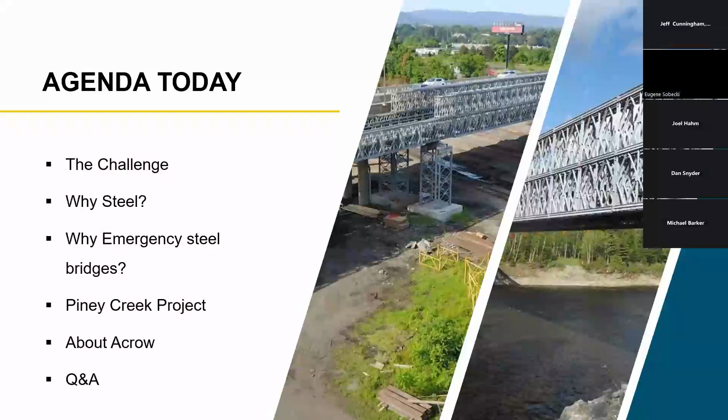Hey, thanks. Yeah, I'll be discussing this project in a little bit of detail, something that we just did very recently. And then I'll also be highlighting another project we did in the past, which also highlights steel in action. So to get started, what I'm going to talk about a little bit is the challenge and why our stakeholders choose steel and why emergency steel bridges are an answer for a lot of situations. About the Piney Creek project, and then about another project we did on the West Coast, and then at the end a little bit about Acrow and questions and answers, which we can defer to the end of the presentation.

Most of the challenges of all these bridges out there that need to be replaced have been highlighted in the ARTBA report. I don't know how many people access that, but it's a good database to find out exactly what's happening in our market. In the last one in 2024, it said 36% of all U.S. bridges require major repair work and replacement, and over 200,000 need repair, including another 76,000 bridges that should be replaced. So sometimes they need to get replaced a little bit before they're scheduled to be replaced due to washouts and storms and incidents, which I'll talk about here in the next couple projects.

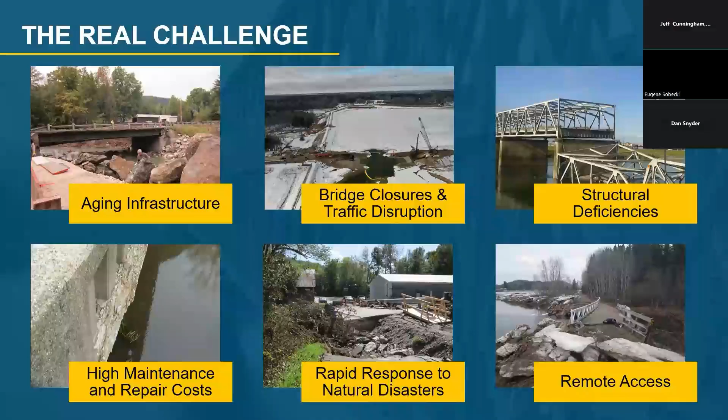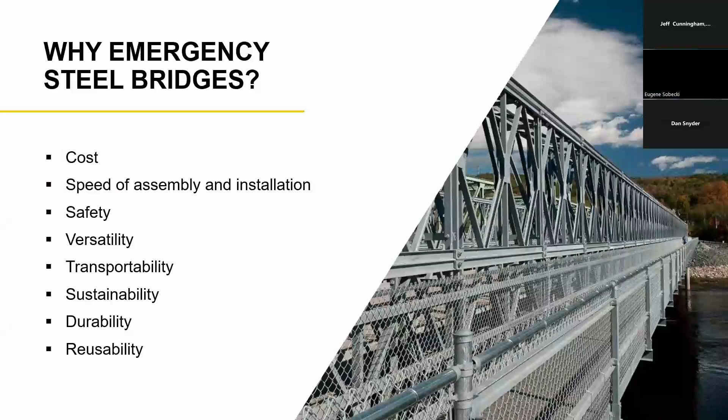Again, the challenge that we all face is the aging infrastructure that ends up with bridge closures and traffic disruption, structural deficiencies in old structures, high maintenance costs, rapid response that's required, and a lot of times remote access to these sites that could get damaged in these natural emergencies. Why emergency steel bridges? A lot of the time people choose steel because of the cost. The speed of assembly and installation is a lot quicker. Safety, versatility, transportability. It's easy to get our bridges into a lot of different remote locations. Sustainability, durability, and also the reusability of our structures.

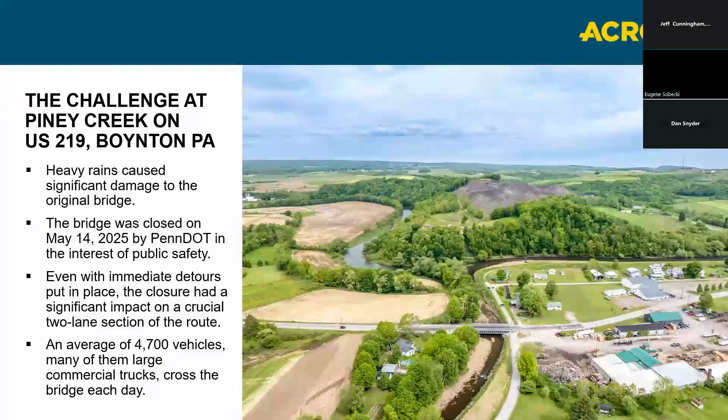The challenges at Piney Creek in Boynton, PA, go back to heavy rains that caused the flooding of the Piney Creek Bridge. And you can see from this photo, it's at the confluence of two rivers coming into the Piney Creek. And that's the replacement bridge on the bottom. Unfortunately, I didn't have pictures of the old bridge, but this is the replacement bridge that was put in place. And this happened back on May 14th, this year. PennDOT closed the bridge. They put detours in place because they had to get the traffic around it, because it was handling about 4,700 vehicles a day.

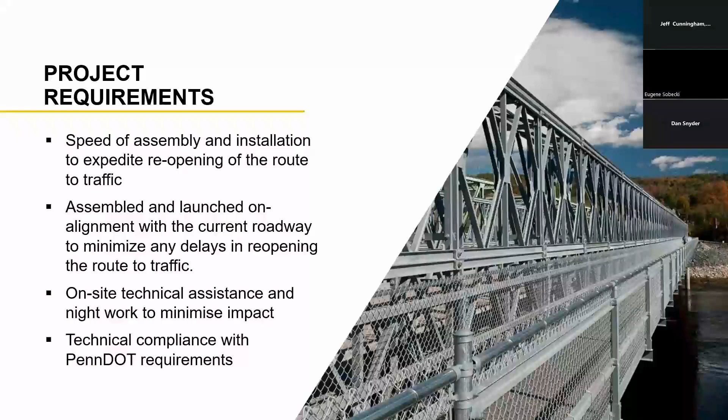Again, this is the project view. This is our bridge in place already. And it's kind of hard to see in this photo, but there are power lines just north of the bridge, which caused a little bit of concern when placing cranes during installation. The project requirements required speed of assembly and installation to get it open as quick as possible. The assembly and launching on alignment, because they didn't have time to come up with an off-alignment situation. So we are on alignment of the original bridge. And we also had to give them full on-site technical assistance, because this project went 24 hours a day until it was completed. And then we had to have full technical compliance based on PennDOT requirements.

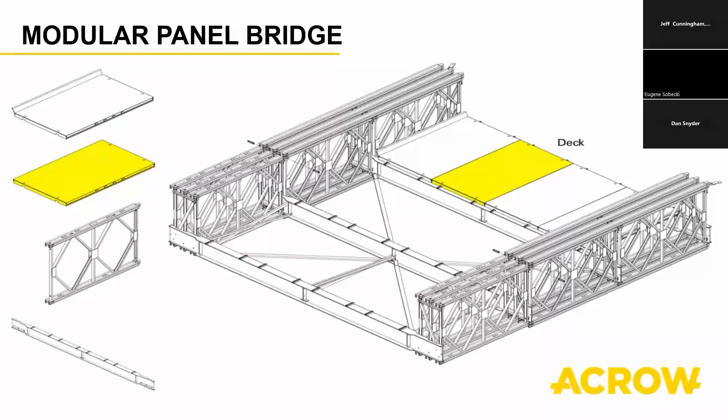This is basically the structure that we proposed to them. It's our panel bridge, which makes it a little bit easier. It's all just based on modular units that we call commercially off the shelf. We keep these in inventory all the time so we can really respond to these emergencies. One of the main ones is the panel. The other is a transom, which dictates the width of the bridge. And then our decks, which are all 6x10 units, whether they're curb or infill deck. So we can use these pieces and parts. They all sit in our warehouse locations in New Jersey, Pennsylvania, Memphis, Tennessee, and also on the West Coast in Centralia, Washington.

The specifications for this project required a 100-foot long bridge that had to be 30-foot curb to curb for two 12-foot lanes and 3-foot shoulders on either side. They wanted it paved with a crowned asphalt overlay to account for drainage off the bridge. It needed a guardrail system designed to meet the TL4 loading criteria, and it had to meet full PennDOT design, which was PHL-93 for legal, their P-82 permit loading, all as per their PennDOT Design Manual Part 4.

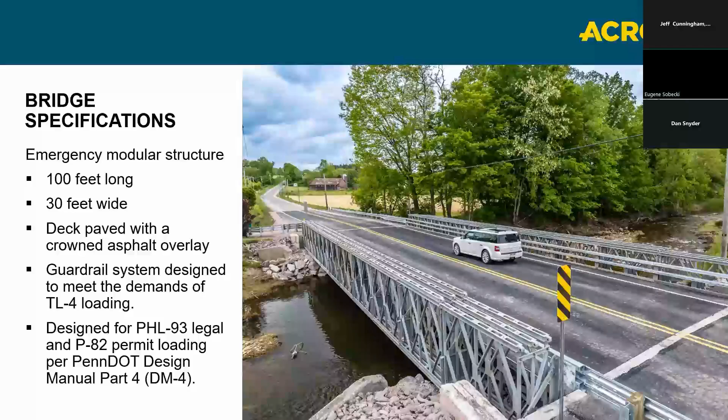Talking a little bit about the project timeline. Like I said, they closed it on the 14th. We got our call very early the morning of the 15th. If you went to our website, there's some emergency contact numbers. Unfortunately, I'm one of them, so it means I always have to answer my phone, whether it be 2 o'clock in the morning or 8 o'clock at night.

So we received a call on the 15th telling us about the problem, first from the design engineer and then from the contractor. By that same afternoon that we received the call, we already determined the span length and width that we had to use. And that evening, within about 10 hours, we sent preliminary reactions to the contractor, which was Merlo, so they could start designing the bridge foundations.

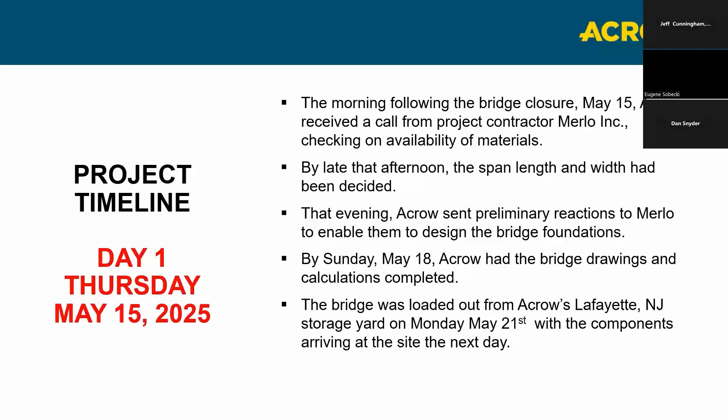And by Sunday, the 18th, we had full drawings and calculations completed. The full submittal package was then sent out on Sunday night, so they had it first thing Monday morning. The bridge was loaded out of our New Jersey facility on Monday, the 21st, with the components arriving the next day on Tuesday at the site.

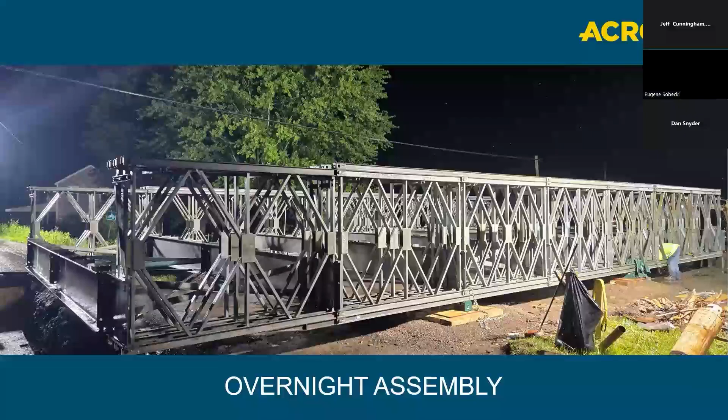This is some of the overnight assembly of our bridge system as they were putting it in. The bridge was actually constructed on rollers. If you look on the base of the bridge, you see some green on top of the blocking. That's our roller systems, because the bridge had to be installed by a crane-assisted launch. Because if you just look north of this photo, you can see the power lines that are right next to the bridge. So very difficult getting a heavy crane to lift it and pick it. So they decided to push it across and use what we call a crane-assisted launch.

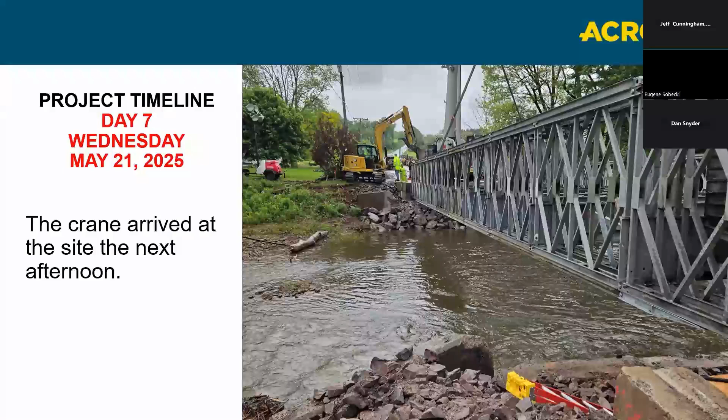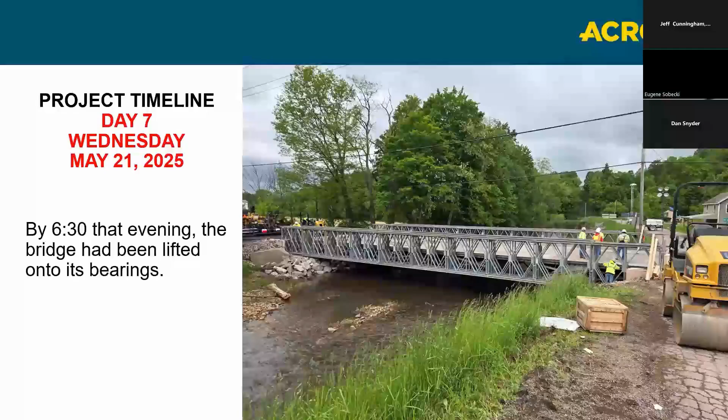By day 7, which is Wednesday, the crane arrives at the site, so they can use what we call crane-assisted launch, where they support the nose as it comes across, and then eventually get the bridge and put it down on the bearings. So that was all accomplished by Wednesday, the 21st, at 6:30 at night, again, working 24 hours a day. And then they went right into preparing the bridge.

These are the approaches; they had to add asphalt into the approaches to bring it up a little bit to the correct back wall height. Not too much of an elevation change, but just enough that they needed to put a little bit of asphalt in to bring up the approach roads to meet the new alignment of the bridge.

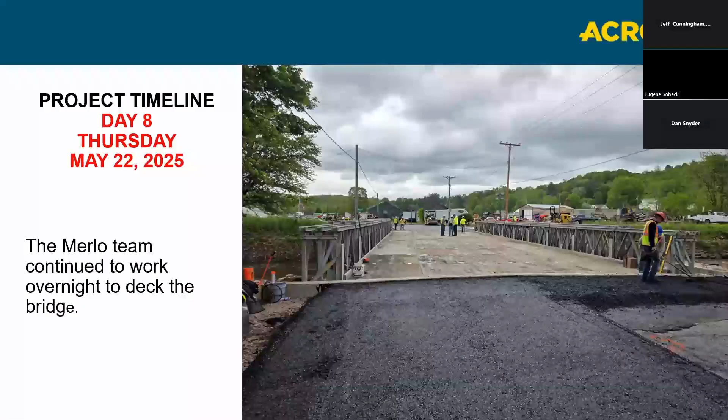And then Saturday rolls around on day 10, and the bridge is open to traffic, getting it done in less than 2 weeks after the closure. So we were able to get this open to traffic and keep everybody happy within approximately 10 days. So that was a quick action, getting all the stakeholders involved: the DOT, the consulting engineer, the contractors, and our on-site supervision, along with our operations department and engineering team, to get it done within 10 days.

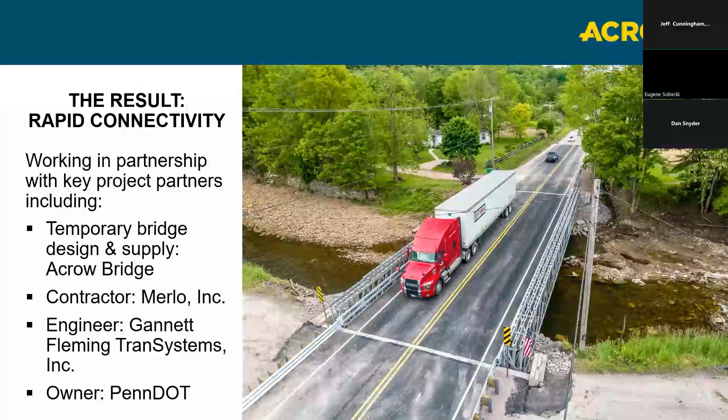And the final result was rapid connectivity, working in partnership with all the major stakeholders. The design and supply of the bridge was by Acrow. The contractor was Merlo. Engineer for PennDOT was Gannett Fleming TranSystems, and the owner, of course, was PennDOT.

Accelerated bridge construction with Acrow, again, because of the speed, using steel makes it quick. This is all off-the-shelf material. So we reduced downtime, optimized cost, and allowed for a temporary bridge to be launched in less than 2 weeks. The solution allowed us to restore traffic quickly with a very easy installation.

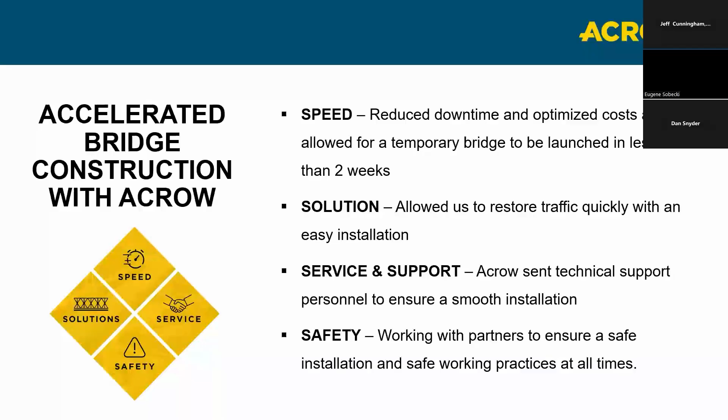And the service and support, we had technical people on site within 24 hours of the closure to first do site assessment and then to ensure a smooth installation. And safety, because all our site supervisors are trained in safety operations, so we make sure we have a very safe installation and safe working practices at all times, because that is extremely important.

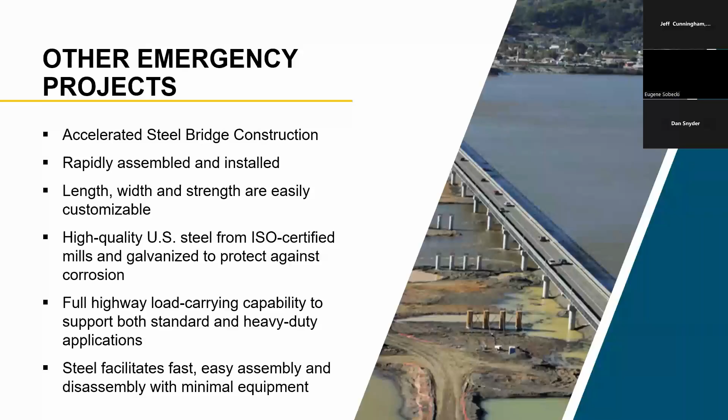Other emergency projects - our bridges are used a lot for emergency projects because of the accelerated steel bridge construction, rapidly assembled and installed. We can customize it easily, it's almost like a big erector set that can be put together to get the spans and widths required. We can support fully highway load carrying capabilities and heavy duty permit applications. The steel facilitates fast and easy assembly and disassembly with minimal equipment, which drives the use of steel for these replacement projects.

We can handle typical design criteria for these projects like Piney Creek or loading design. We can do whatever is required, ASD, LRFD, MLC for military or heavy haul. We have a variety of different bridge types.

The one used on Piney Creek, we used plain steel with an asphalt overlay because we needed the crown in the center for drainage. We can also do a steel deck with an anti-skid coating applied to it, which actually gets the bridge open a lot quicker because you don't have to asphalt the deck once it's placed - you just drop the deck and you're good to go. We can do timber decks if it's a bit heavier loads and point loads on the wheels, and then we can do stone-filled pans if required in rural locations.

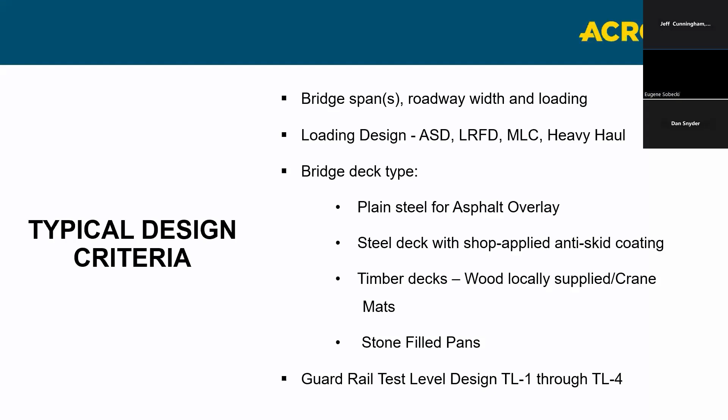And all our guardrail is designed for TL1 through TL4 requirements. Like I said, the bridge is designed to meet AASHTO, ASD, HS20, HS25, HL93. Our widths can go from 12 to 42 foot curb to curb. Our single spans can go from 10 foot up to 300 foot for a single lane.

We do about 240 to 260 for a two-lane bridge, clear span, that's the unsupported total length. And then we also do pedestrian bridges. And of course, if the bridge has to be longer than the 240 or the 300, we can do multiple spans, whether they're independent or continuous. Our bridge deck is a steel orthotropic deck system, all 6x10. And the driving surfaces can be a variety of asphalt, anti-skid, plain steel, or wood.

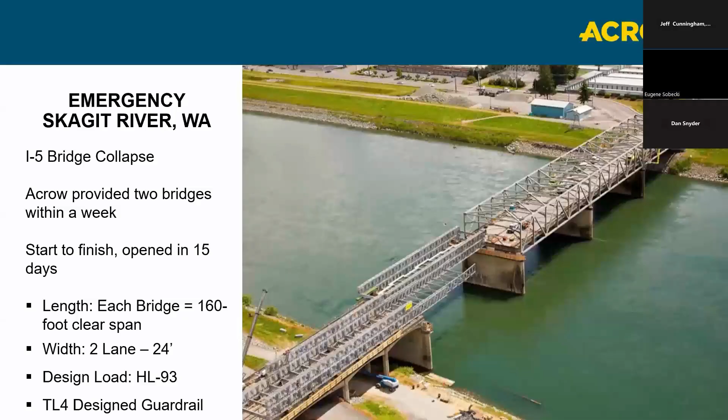This is another example of an emergency project we were involved in, the I-5 bridge collapse in the state of Washington, north of Seattle. This bridge went down, so we provided 2 bridges within a week. Start to finish for this whole project was 15 days. We put in 2 bridges, 160-foot clear spans. Both bridges were 24-foot curb to curb, full design loading to HL93 because it was a state interstate, and designed with a TL4 guardrail system. I just have a couple of quick pictures of why this bridge happened.

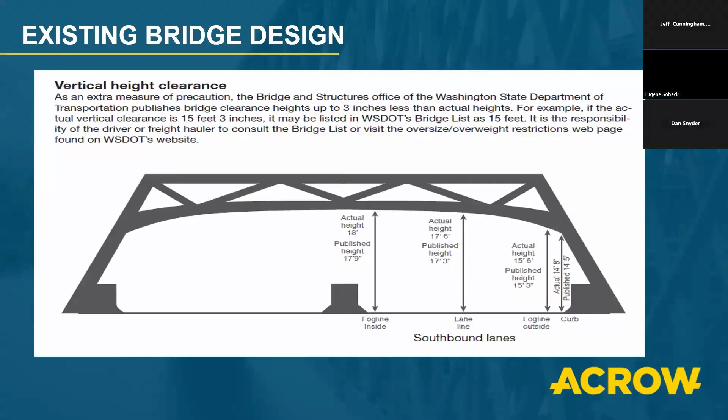Now, this is what caused the problem on this bridge, because the truck had the permit for overheight, but the permit was supposed to go down the center of the highway. Well, unfortunately, he went a little bit to the right and clipped that overhead truss. When he clipped the overhead truss, we had a total compression failure of the top chord, and that 160-foot span ended up in the drink of the river there.

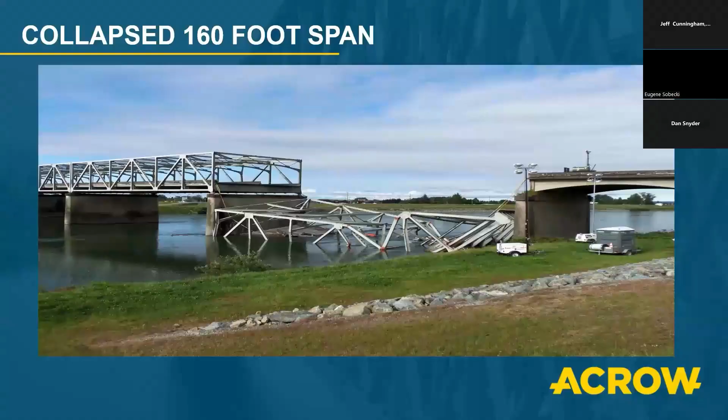You can see it here - a couple cars went in. Fortunately, nobody was fatally injured on this project, just a lot of minor injuries. But you could see a good example of compression failure of that top truss just because they clipped that one truss on the upper right-hand corner.

So we were called into this project pretty quickly. It happened on a Thursday. By Friday, we had preliminary designs put together. And we said, okay, we can't do a 4-lane bridge as the interstate required, 48 foot curb to curb, but we can do two-lane bridges.

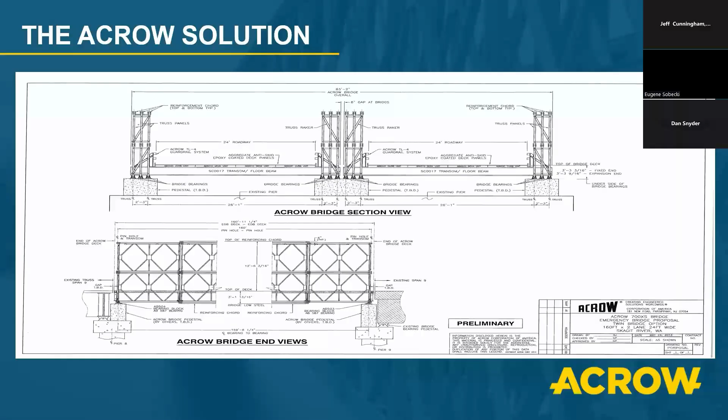So we came up with a design for two-lane bridges, 24-foot curb to curb, side by side, to open up this interstate. Again, critical interstate, basically the main route between there and Canada heading north out of Seattle. So the pressure was on to get it done. Part of the pressure was generated by Costco, who was at one end of the bridge, and they were losing $1 million in revenue a day because traffic could not get to the Costco store. So it tells you a little bit about the strength of the local community.

So we started delivering steel. This happened on a Thursday, and of course before Memorial Day weekend, because emergencies never happen on Mondays at 9 o'clock—they always happen on Friday nights or before a long weekend. We were able to get steel across the country and into this location by Tuesday morning, and then we started building bridges on the approaches.

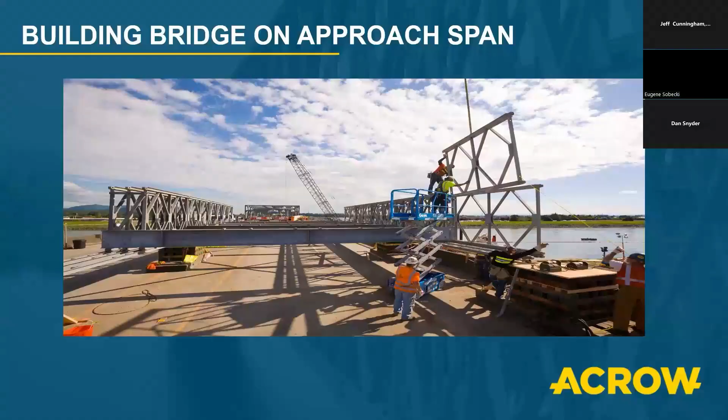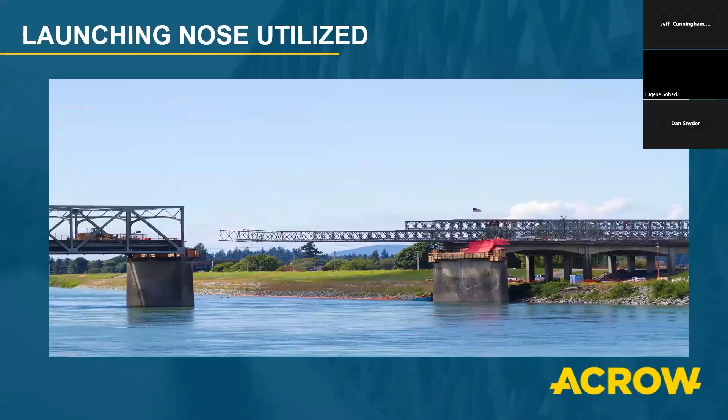Here too, you can see some of the steel being lifted into place. We had to do a double height truss configuration, and we had to build one bridge at a time, then launch it across this gap to go into the other structure. For this bridge, we had to use a launching nose because we had to go through the other end, almost like threading the needle to get this launching nose into the other trusses on the other side. That single height truss configuration going from right to left is our launching nose—it's only there to help launch it across, because we couldn't get any cranes to lift it and pick it into site on that river.

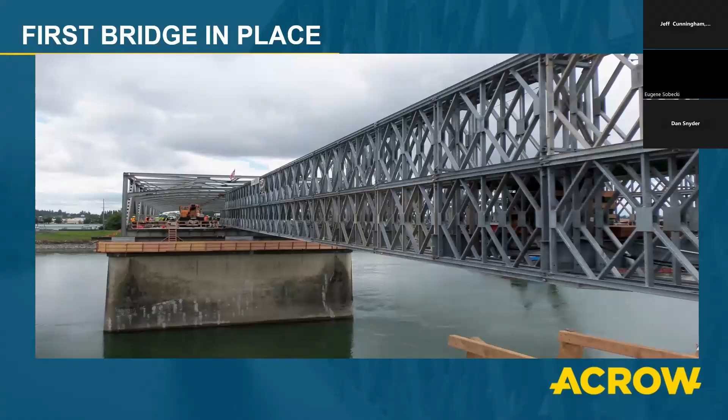This shows the first span going into place, all the way through. You can see how tight it is, as we had to shoot through the existing bridge that was still in place—we had to get our structure right up into those trusses. So that was the first 160-foot span we put in place.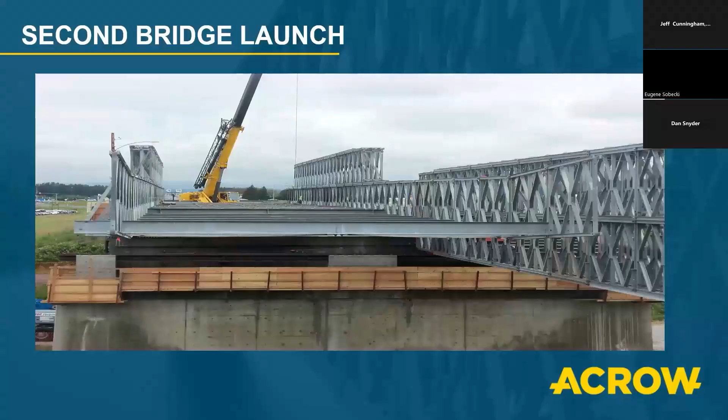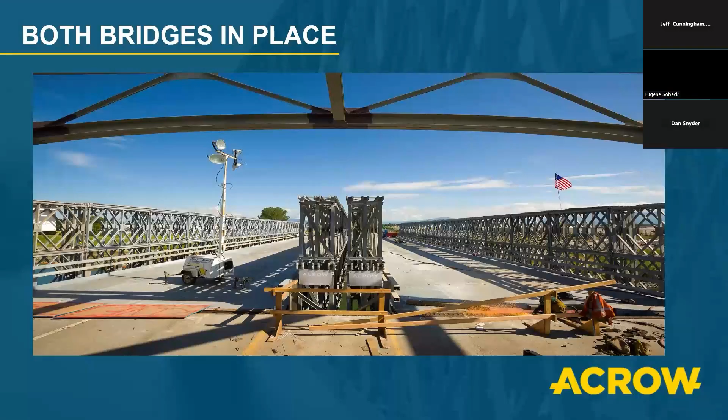This is it coming across with the second bridge—you can see now we got clearance. The old bridge is on the right-hand side without any issue, and the second bridge is making its way across. This is another photo showing the launch of the second bridge as it's coming across to meet up with the existing bridge. And then finally we got both bridges into place. They fit in—we moved them over, slid everything into place, got them down on the final bearings and ready to go.

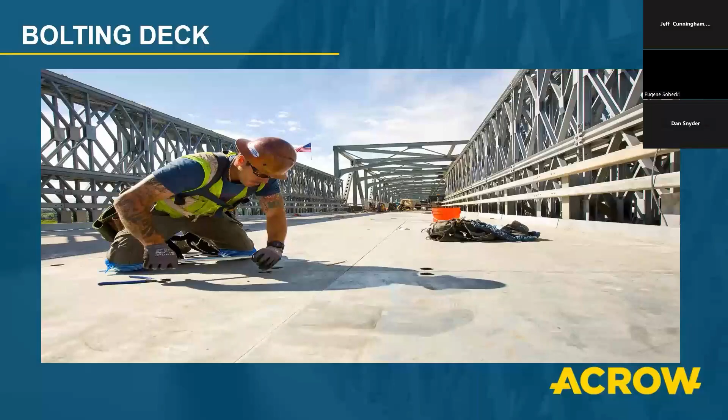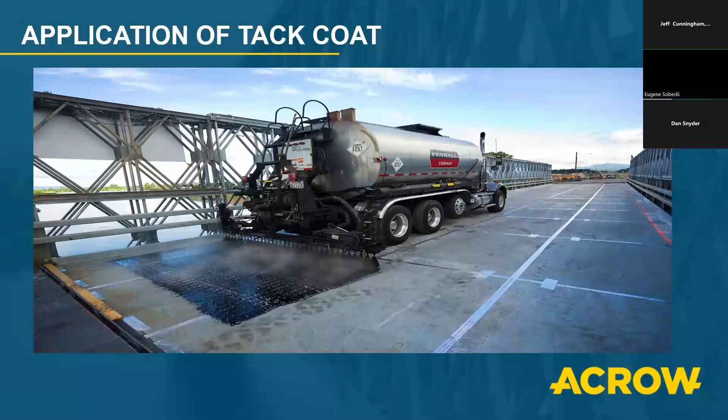What's nice about the system too is that the deck is all secured from the top. So once the bridge is in place, they lay the deck and can come down and just attach all the decking from the top—there's no reason to go underneath the bridge to attach the steel deck. After that, we had an application of our tack coat. Because this was a mainline interstate, they wanted it asphalted, so we came up with a system of going with a tack coat, then using a fabric, then a final asphalt application on top.

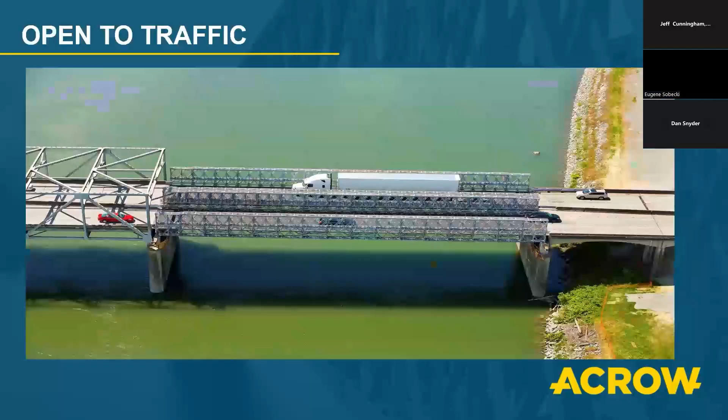And then we did our final inspections. Here we're just waiting to do the final striping on the bridge, but it's all ready to go. The bridge is finally in place and open to traffic within 14 days. We could have done it earlier than 14 days, but the NTSB had it shut down for 4 days because it was considered an emergency site—there were cars in the drink, and they had to do their full investigation first.

Again, why steel? Availability, the cost, sustainability, significantly less time on site due to prefabrication, no forms to build up or strip, better quality control, no negative impacts by weather, lighting, etc.

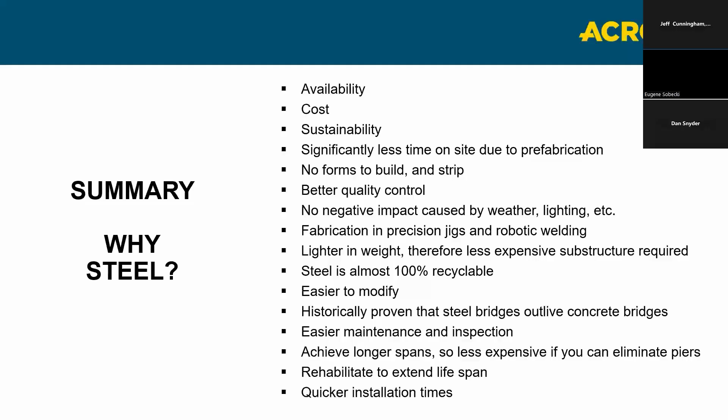We have precise fabrications. Everything is done robotically in our plant in Milton, Pennsylvania. With the new steels, we can get a lighter weight and strength ratio. Our steel is 100% recyclable, easier to modify, historically proven in steel bridges, easier for maintenance and inspection, because it's all galvanized, and achieves longer spans, less expensive, and quicker installations.

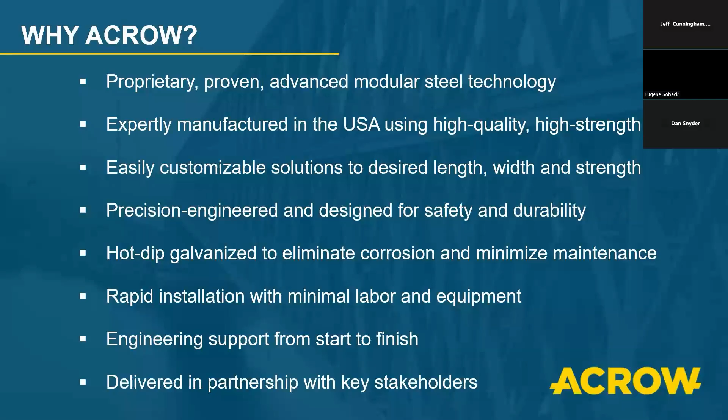And then why Acrow: we have this proven technology that we've been working on since the 60s. We manufacture in the U.S. using all U.S. high-quality steel. We can customize it to what's required. We have our precision engineered design for safety and durability. It's hot dip galvanized, eliminates corrosion, minimizes all maintenance. We've got very rapid installations, as you can see from these two case histories.

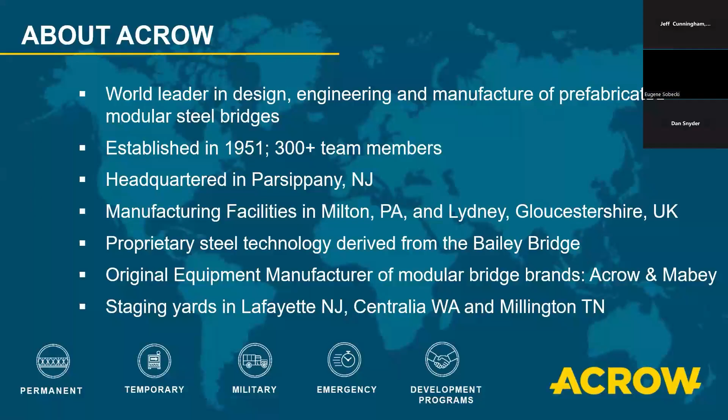And we have engineering support from start to finish on any project, and we're in with all key stakeholders. Acrow's been around since '51. We're based out of Parsippany, New Jersey, with manufacturing locations in Milton, PA, and also in the UK. And we're also now the owners of Mabey Bridge and Shore, which used to be our other panel bridge system.

And we have staging yards throughout the United States. Again, just recapping key applications: from vehicular to railroad to detours. We even do movable structures. So we have a lot of different options. So in a nutshell, I think I did it under 23 minutes. So, any questions?

It looks like a couple of questions. Is this the Bailey Bridge that the Corps of Engineers have had for years?

It's based off the Bailey Bridge. In this presentation, I normally start off giving props to the Bailey Bridge. The Bailey Bridge was designed for World War II in 1936, so this is all based on Bailey Bridge technology. Same thing, but different. It's like I always say, it's like using a copier — you have one copier that does so many functions, and then you have another copier that can do a lot more. So this is newer technology, higher strength steels. We do wider widths, but it is based on the old Bailey Bridge system.

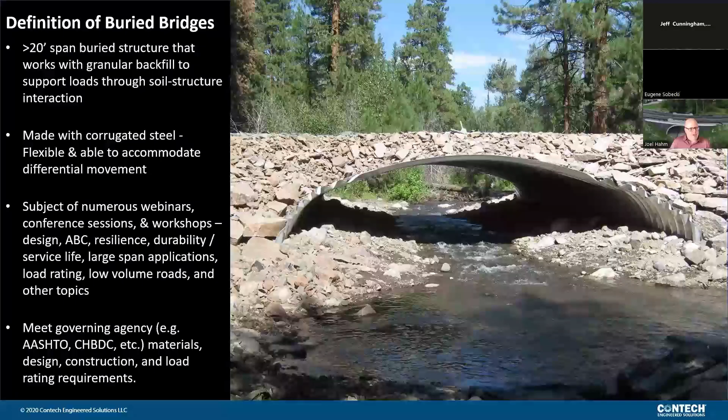Some of those you may have heard through the Short Span Steel Bridge Alliance or with AASHTO or TRB. These structures conform to design codes and standards worldwide and meet requirements for materials, design, construction, and load rating, and are not proprietary. They're designed using finite element analysis, which is a bit different than what you may be familiar with for smaller drainage structures, sometimes called culvert bridges. I don't think that's very accurate, aside from the fact that they're both corrugated, but that's one of the main differences.

There are two main categories of metal buried bridges, based on the corrugation profile depth. The corrugation profile is measured from peak to valley, so peak to peak for the width and peak to valley for the depth. Anything with a corrugation depth of 5 inches or deeper is considered deep corrugated. Anything smaller than that is shallow corrugated.

On the picture I'm showing here, those are the three most common steel corrugation profiles: the shallow corrugation profile, the 6x2, and then the 15 by 5.5 and the 19 by 9.5, which are deep corrugated. One of the biggest advantages of deep corrugated steel is that comparing the 15 by 5.5 to the 6x2 profile, deep corrugated steel is about 9 times stiffer and over a third stronger, sometimes double the strength. That means we can get into much heavier loads and longer spans, which puts these in the realm where they're a viable alternative to conventional bridges on a lot of projects.

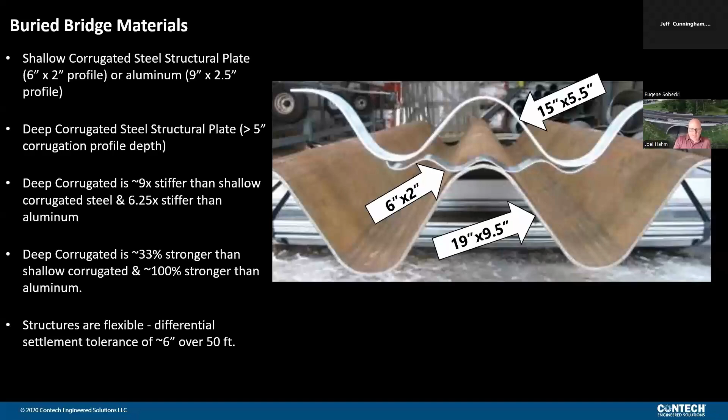In addition to that, these structures are flexible, and there are some definite design and performance advantages you can take advantage of if you're willing to consider that as part of the design and development of those projects.

There are a number of advantages and applications. I've listed a few of those here. The most common ones: generally you can use this anywhere you can use a short to medium span bridge, spanning water, spanning a road, or spanning a pedestrian path. As far as carrying loads, they can carry anything a conventional bridge could carry, including very heavy loads like rail and mining type loads. Structurally, these are redundant and resilient, and there are big advantages there. By definition, almost all buried bridge projects are accelerated construction projects, so there are a lot of construction and constructability benefits, foundation cost savings, and maintenance and inspection that's much simpler than a conventional bridge.

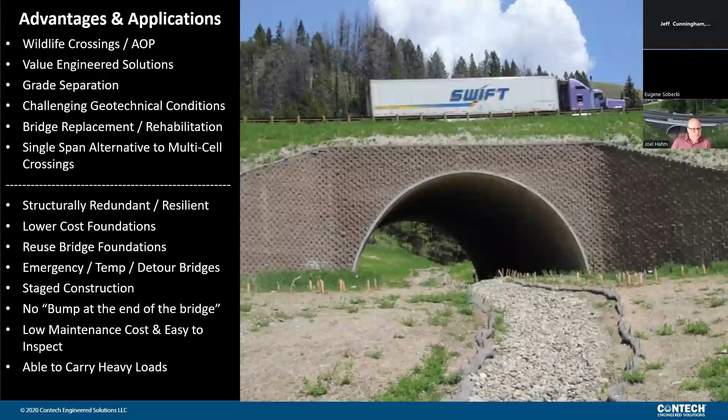Moving into our case studies, I have a handful I'm going to share with you that talk about some different aspects, kind of a range of capabilities, just to help visualize where and how they're used.

The first one I'm going to talk about is at Audubon Hollow, in the Galleria area in Houston, Texas. This was an area that was previously undeveloped but surrounded by developed areas with only one way to get in and out. So in order to get in and out of the site, they had to span a pretty large drainage ditch area, and they decided to go with a 32-foot span, deep corrugated arch structure. Because of work that needed to happen before the project could be fully designed, there was a need to get in there before everything was fully figured out. So they decided to go with stage construction with the buried bridge structure, putting in a single lane access road so the contractor could do some of the upfront work while they were working through the final site design to finish the project.

Another neat aspect of this is that there's an architect involved. This was a high-end residential development, and they selected this type of structure and also wanted to use recycled concrete backfill for sustainability reasons, which we were able to incorporate on this project. They also wanted to use MSE welded wire headwalls, mainly for the aesthetic look of them.

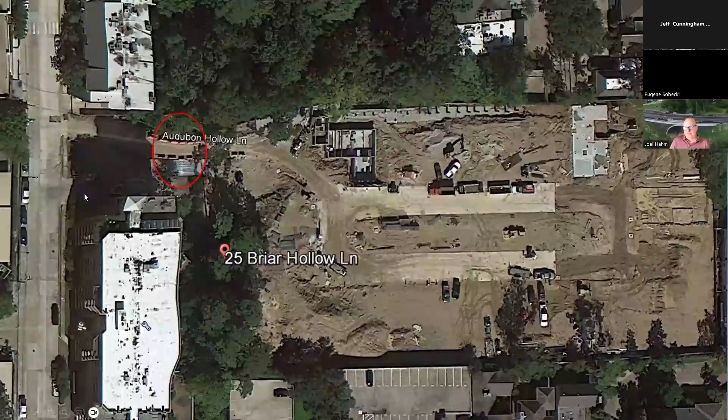This picture is after the second phase is done, and the structure's in. I don't think they've quite finished with the end treatments here, but it's far enough along where the bridge itself is actually done, and they're moving forward with construction of the houses in the area.

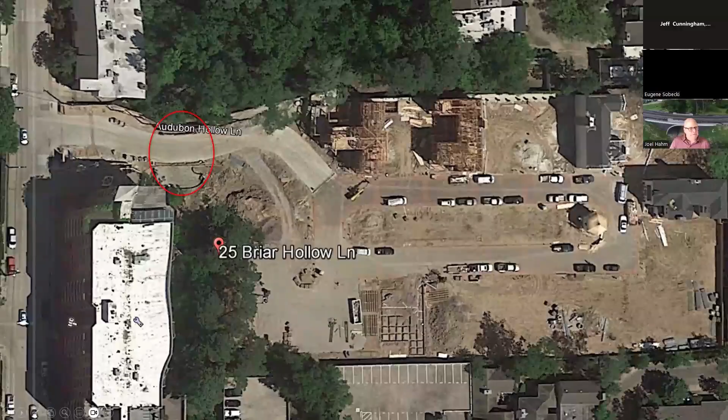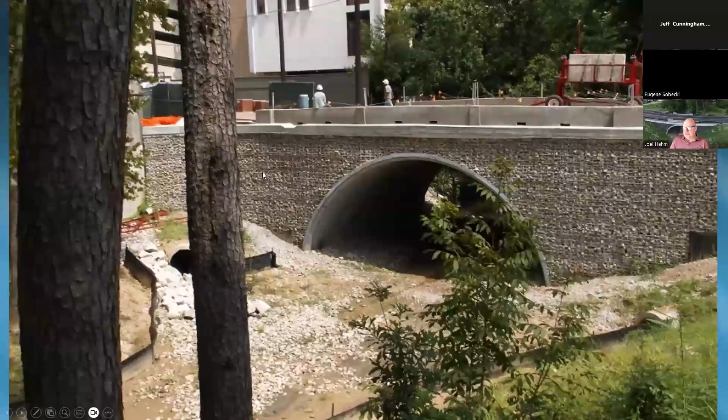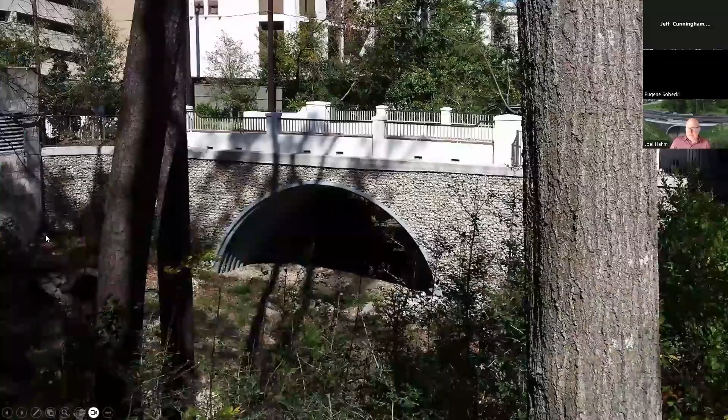This is the other end of the structure after it was completed. So they finalized the layout. They're able to curve it, and that's a neat feature with the wire head walls - you can pretty much make them look like and go wherever you want them to. Then finally, after it was finished, they added their architectural treatments, some barriers and some ornamental railing, and the project is finished.

This next one is in Attleboro, Massachusetts. A temporary bridge built as they were going to replace two 3-lane I-95 highway bridges. This is south of Boston. As they were replacing each of those bridges, they wanted to build a temporary bridge in the median to carry the traffic, to not have to do any detours or disrupt things so much as they're doing that work.

Originally in the project documents, they were specifying a Bailey Bridge in that area. One of the contractors bidding the project reached out to us to see if there might be a buried bridge alternative for this, and we were able to come up with that. The structure had to be sized to accommodate basically 2-lane highway clearance plus a pedestrian walkway on either side of the road through the structure, without changing the final grade above. We were able to do that and ended up saving about 4 months on the project and over $1 million, and essentially helped that contractor win the project.

This structure consisted of 5 plates for each ring. Each ring of the structure is 2 full corrugations, and the plates are 2.5 feet wide, so 5 of those plates bolted together form that structure shape - 100 plates total. The contractor, who had never built one of these structures before, was able to assemble the entire structure

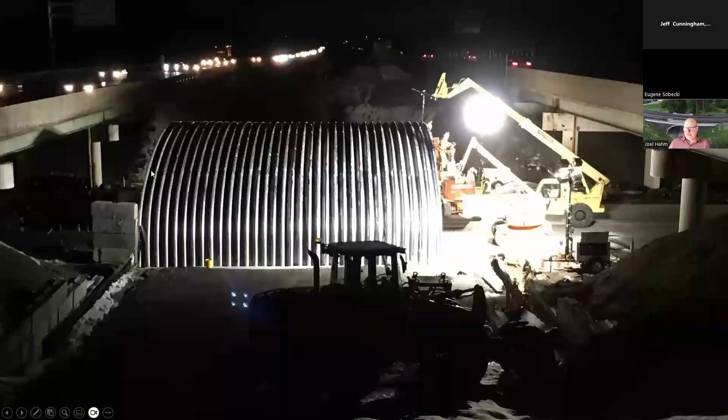This backhoe here is the biggest piece of equipment that they use for the assembly of the structure. This is typical on most projects, unless you don't have access nearby where you don't have a long reach. This was built during the winter of the year, so they finished in the dark, and this is them getting close to the end of the structure.

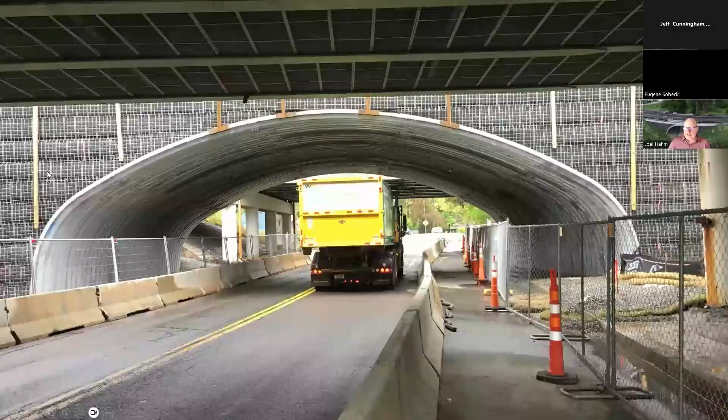This gives you an idea - since this was a temporary structure, they weren't really focusing on what the head walls were going to look like. Normally you'd have rock facing, similar to the Audubon Hollow structure with this type of system. In this case, they just used the geotextile to speed things along. But this gives you an idea - there's room here for 2 semi-trucks to pass each other, plus plenty of room for pedestrians to cross on either side.

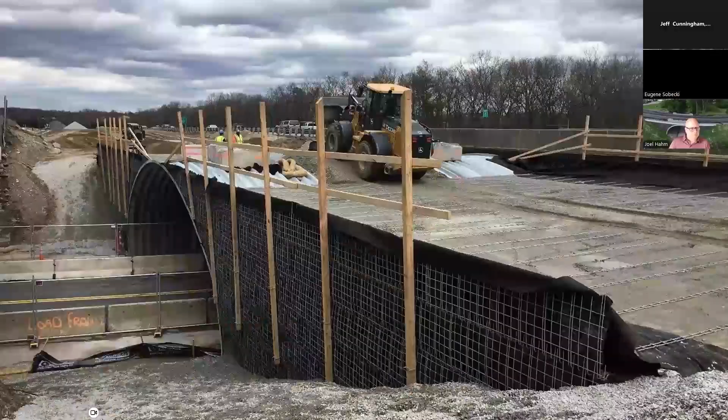Another view as we're nearing filling over the crown of the structure. You can see the grid strips for the MSE walls here.

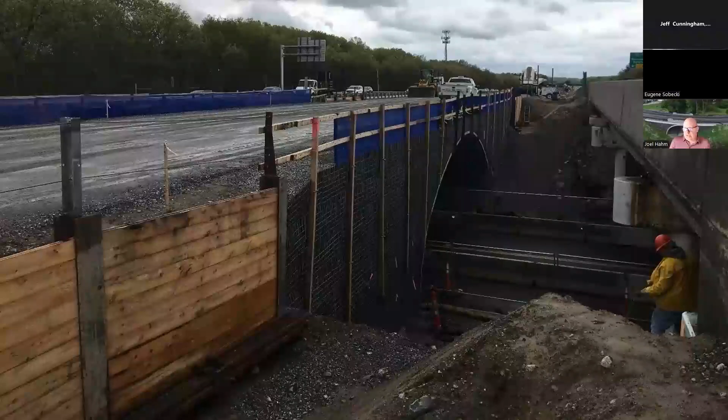This is at final grading shortly before paving. This structure was actually instrumented and incorporated into an NCHRP research project that was looking at load rating buried structures. The results of that are available in a report. If anyone is interested in seeing it, I can provide that, or I can get that to you.

Ultimately, what it showed was that the way that we're designing these structures is probably a little bit conservative, using the AASHTO requirements, and it also validated the finite element design models that we're doing. So it gives a lot more confidence for the design of these larger structures.

This was in service for about 1.5 years. Once the bridges were completed, it was taken out and has probably been recycled already into who knows what, because steel is the most recycled material on earth.

This next project is pretty unusual. This is one of those things that I'll maybe never get to see again. This is also a bridge replacement up in Alaska on the Klondike Highway, close to the border between Alaska and Yukon Territory. This had, I think it was about a 250-foot span suspension bridge that wasn't able to handle the traffic anymore. The anchorages were starting to pull out of the foundation, but they still needed to have a bridge there.

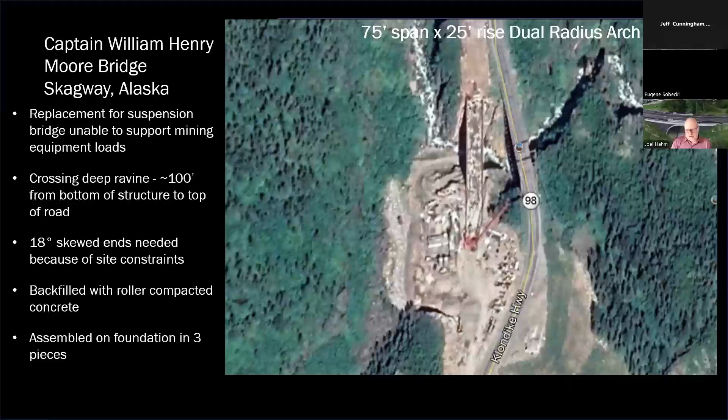Because of site constraints and just the site limitations, the structure had to be skewed quite a bit, about 18 degrees on both ends. And then to make things even more interesting, there really wasn't a way to get inside the structure during construction to do any of the assembly. So we ended up designing this structure for the special site conditions and requirements, and also detailing it so that the whole thing could be set on the foundation, built from the outside.

This was our geometry. It was a 75-foot span by 25-foot rise, multi-radius arch. At the time it was built, this was the longest span flexible buried bridge in the US. There were some additional features added here for the modular construction. One was 4-inch by 4-inch rolled angle placed on the ends of each segment. So the structures could be set on the foundation, butted up to each other, and the rolled angles were bolted together. That's essentially to close the gap.

Because this structure had a skew on it, we came up with a system using beams that would be bolted onto the complete rings of the structure and essentially cantilevered over the skewed ends of it to provide temporary support of the skewed portions of the structure as the concrete was being placed around it.

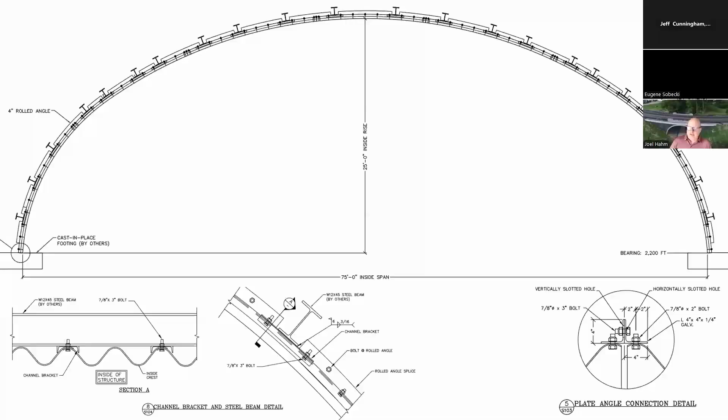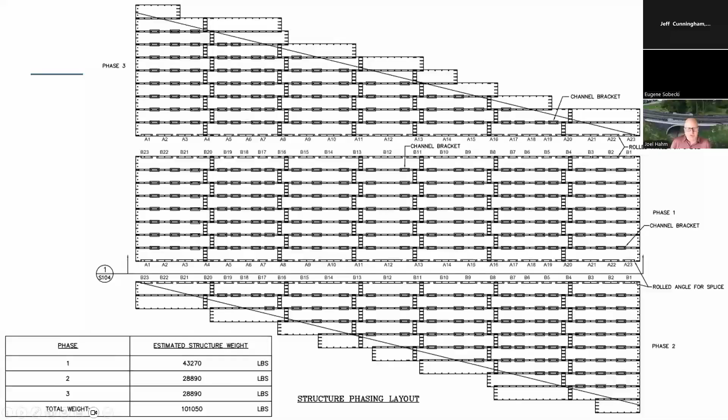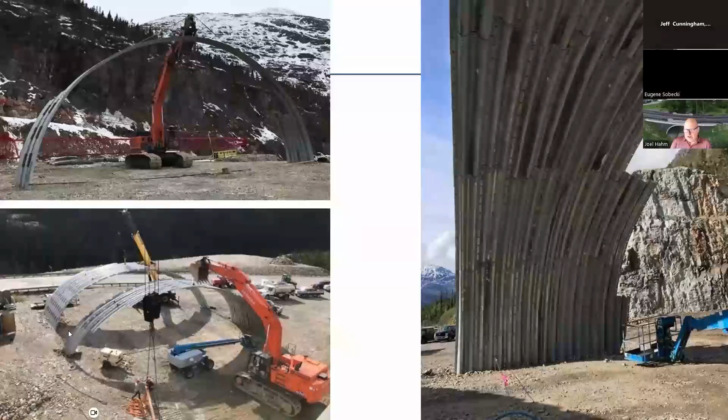So I don't know who's more nervous in this picture, the guy in the crane or the guy in the backhoe who's doing the excavation. But sometimes that's just how you have to do it. You've got to figure out a way to get things done in areas like that. This is a staging area above where the structure was being set, where they pre-assembled everything, and then they would pick it up with a crane and lower it onto the foundation.

So in the foreground here at the bottom left, you can see that that's one of the skewed sections. The other skewed section is on the other side of it, and the middle section's already been placed into the hole. So here's that first phase placed on the footing, and then they're flying in one of the skewed sides below, set it down, butt them up to each other, bolt the angles together, and then do the next one.

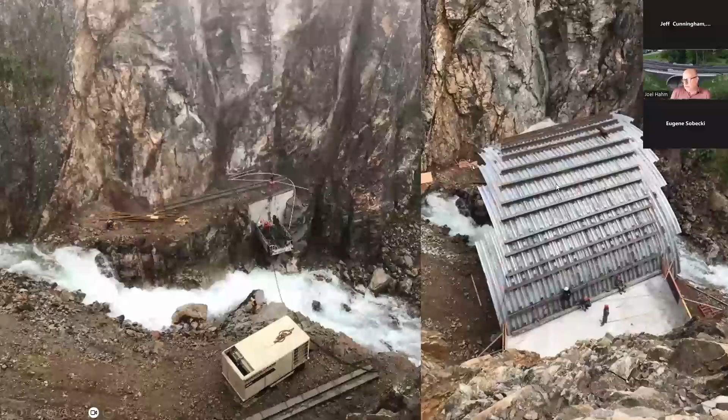So here the whole structure has been assembled. The beams have been installed. On the left is the foundations before, and then on the right is after the structure's been assembled. They've already started with placement of the concrete fill. The structure was designed to accommodate essentially 5 feet of cover using concrete as a fill material.

The project engineer determined that once they had 5 feet of concrete over the structure, the concrete would be able to provide adequate support for the placement of the rest of the roller compacted concrete. So in this case, for this application, the structure essentially acts as a stay-in-place form for the complete structure.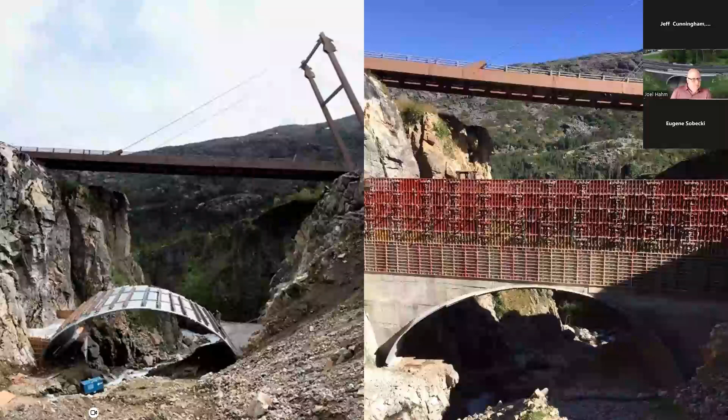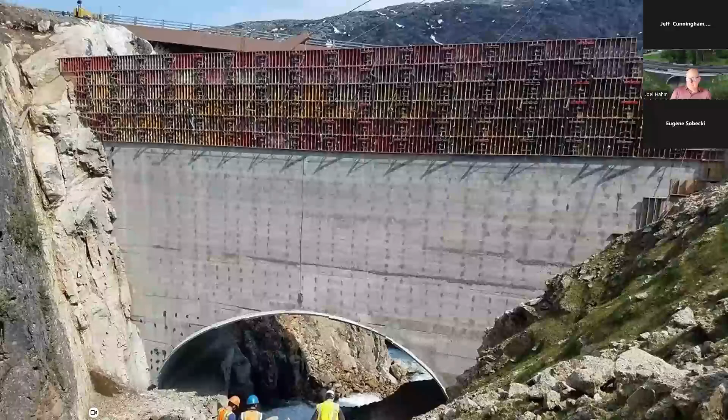So here's another view with the assembled structure partially backfilled with the existing bridge behind it. They placed a site batch concrete around the structure until they got 5 feet over the top, and then from there on up was roller compacted concrete, which was essentially slip formed. I think this ended up taking place over 2 construction seasons.

And there, it's kind of hard to get a good view of it at the end, but you can see the completed roadway here with the structure underneath it. The existing bridge was left in place and is now used for recreation. So if you vacation in the Skagway, Alaska area, you could go see both of those bridges.

This next one, I just kind of threw in at the last minute. I received some information this week about the performance of this structure. This was one that we had built about 5 years ago in Burnet County, Texas. This is in the area where we had that extreme flooding last week. This was the Knife River yard.

Knife River is a quarry there, and this is the only access in and out of the quarry where they're crossing Honey Creek. The structure that we placed in there was a 50.5 foot span by 11-foot-8 rise, low profile arch. So a pretty low profile for an arch shape. Also with MSE wire headwalls on it, designed for Cat 770 haul trucks. So it was essentially a haul road for the quarry.

My understanding was that this structure and the walls were overtopped by about 10 feet during the flooding. The floodwaters removed the concrete barriers above the structure, stripped away some of the pavement, and the fill down to the first layer of the geogrid for the MSE walls.

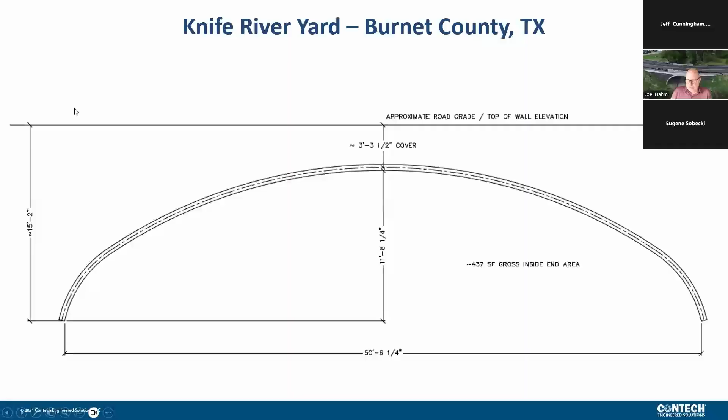This is the geometry that we placed. So a pretty low profile arch without a lot of cover on it. So about 15 feet from bottom of structure to essentially the top of the walls there, with a little over 3 feet of cover.

We received these pictures from the quarry as they were informing us that the flooding happened there, and they're just looking for an assessment of the structure and the walls and seeing what to do next. We haven't been out there to assess conditions for ourselves yet, but based on what's been provided so far, it looks like the structure has performed very well, and for the walls, so far it seems that it's just going to be some repairs near the surface to get them going again.

So in this picture here, this is downstream of the structure. I believe these are the concrete barriers that are shown in the foreground. I don't know if those have been pulled from the stream or if that's just where the water left them. A lot of the road here is missing. Some of the fill is missing off the top, but the presence of the grid strip reinforcing here, I think, helped to minimize the amount of the fill that got washed away.

Another closer up view, the structure looks to be pretty much like new here. We'll get a better idea once we get down there and get a closer look at it. The wall alignment stayed good. One of the benefits with using this type of a wall system is that it's essentially self-draining, and it is pretty durable even for impacts and things like that.

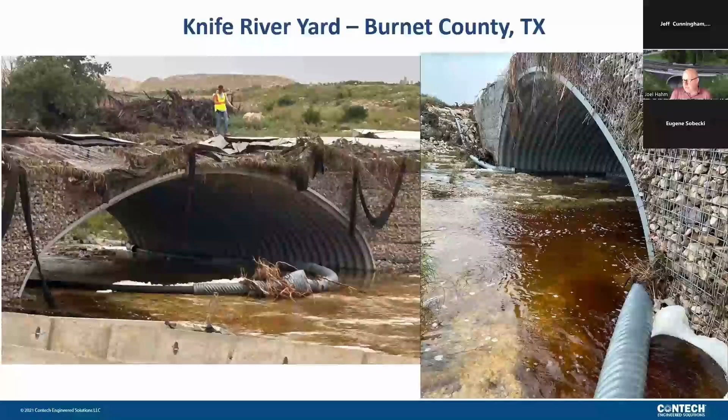Another view here is the downstream end on the left, and on the right is the upstream end. Some debris build up, but again, the wall is in good shape. No visible damage to the structure. Looks like it's doing pretty well.

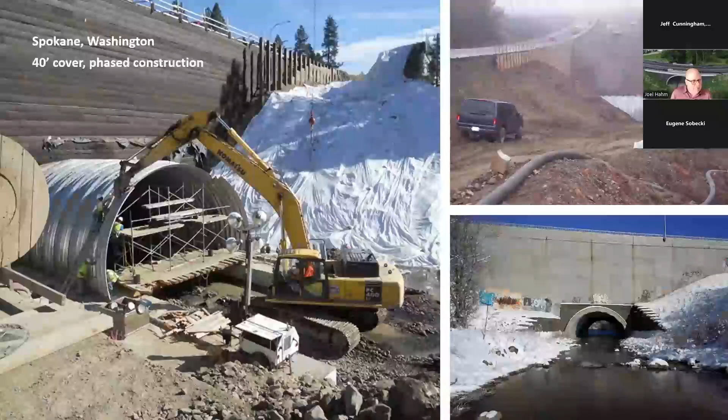So I'm just going to wrap things up here with a couple more snapshots of a handful of projects and then get to some questions. This project is out in Spokane, Washington. Similar application to the Audubon Hollow, even a similar size structure, but in this case we had 40 feet of cover and there was a busy US highway going over the top.

So in this case, they excavated half of the road, put a soldier pile and lagging wall in, and built half the structure, then backfilled with a temporary MSE wall, took out and then excavated the other half and continued building the structure.

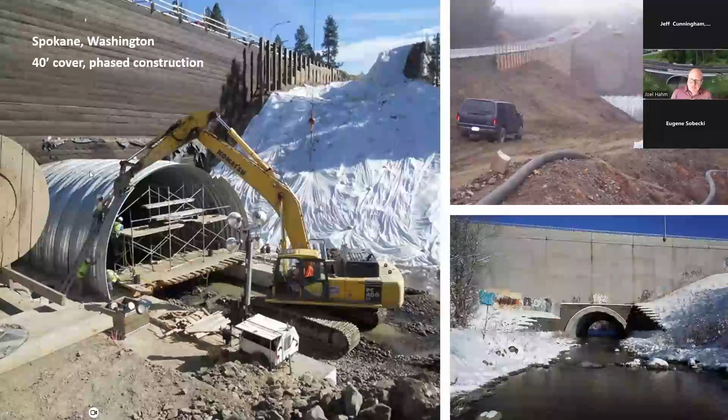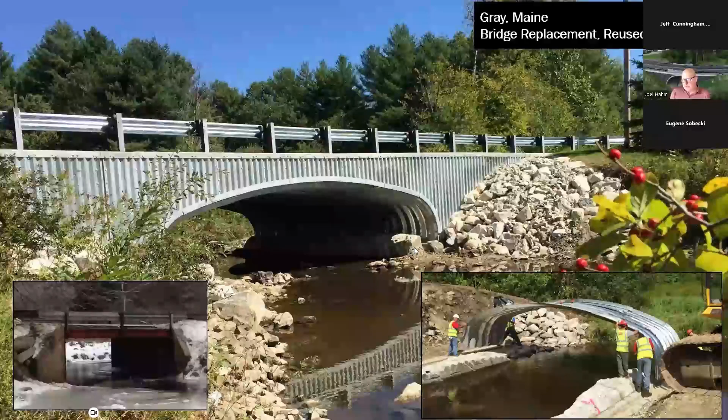There's a steel bridge replacement in Maine, 20-foot span bridge replaced by a slightly larger buried bridge, where we incorporated the existing bridge abutments into the foundation for the new structure. Another similar type of structure built in Craig, Alaska. This one was selected specifically because it could be built by the local tribal forces.

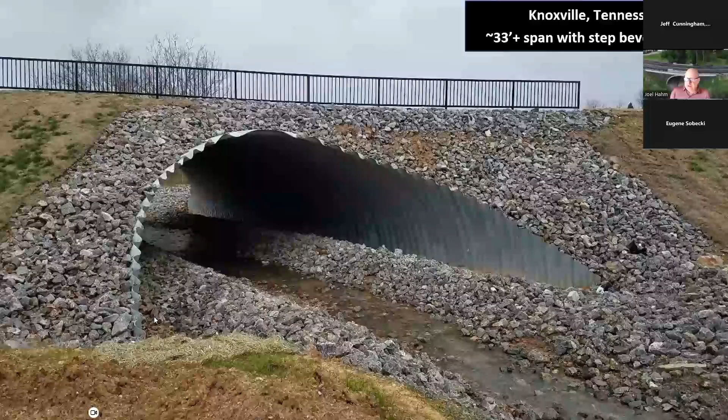Multi-radius arch structure in Tennessee. This one kind of illustrates what's possible if you have the room to let structures go a little bit long. A lot of times you can save cost and maintenance issues by just using step beveled ends. Even if the structure is skewed with the roadway, you can use different length bevels on different corners to accommodate whatever those slopes of the fill are.

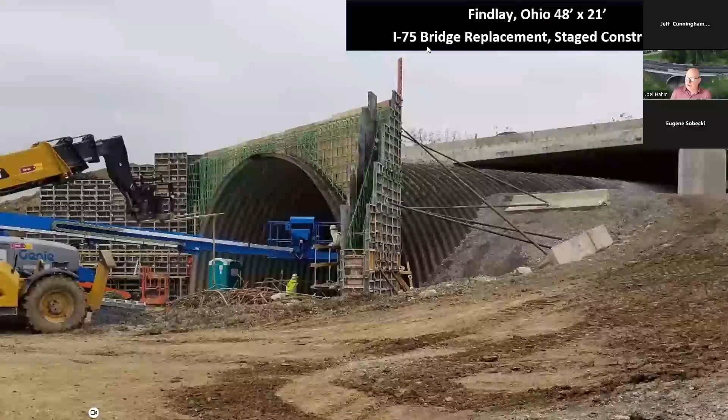Bridge replacement project in Ohio. This was under I-75. They were adding a lane in each direction, going from 4 lanes to 6 lanes. So rather than building more bridges, they built a buried bridge and then just moved traffic over in a staged way as they were rebuilding the roadway and paving over the top to create the new wider interstate.

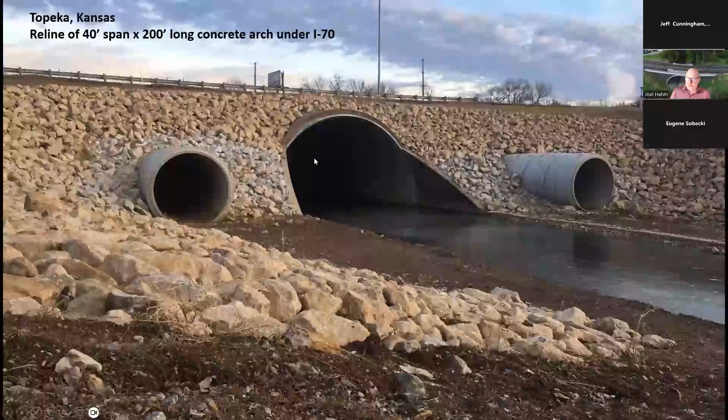This is a rehabilitation of an existing concrete arch in Kansas, also underneath I-70. With this material, if we have good measurements of the existing shape, we can get pretty close with matching with the new structure, providing enough space in between the two to place grout to close that gap and help them operate together.

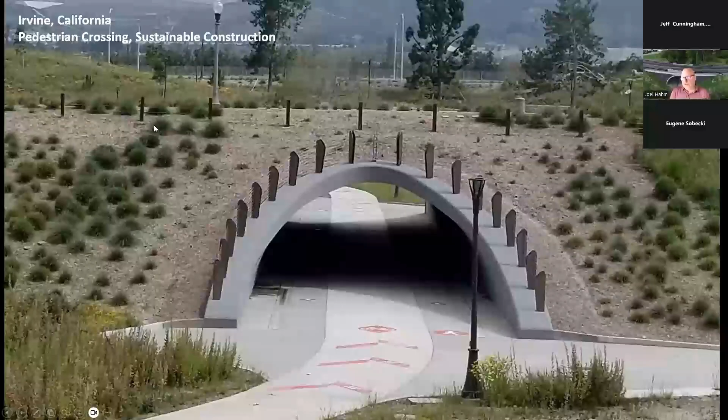Project in California, there are 4 crossings like this over pedestrian walkways. These are fully beveled for aesthetic reasons. This is at the site of the old El Toro Marine Base, where they had the blimps during World War II, and also operated in other ways since then.

After the base was closed, they wanted to redevelop it into a green space and incorporate several of these structures. They also used the existing runway concrete as backfill around these. So another sustainability project.

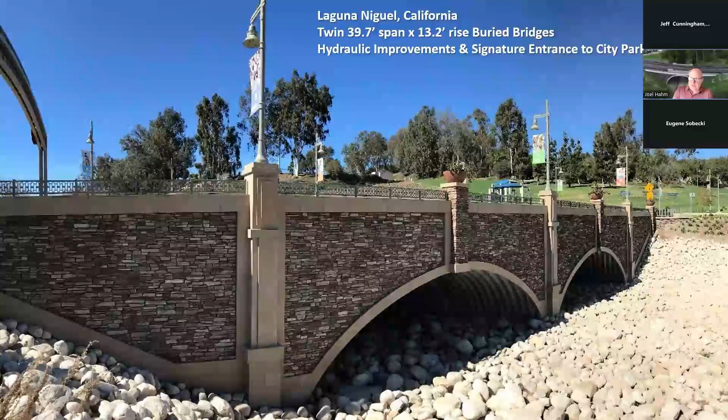Another California project that basically took what used to be a low water crossing that flooded frequently and made it into a signature entrance to a city park. So from a technical or design standpoint, fairly straightforward, but aesthetically, you can make these structures look like just about anything you want.

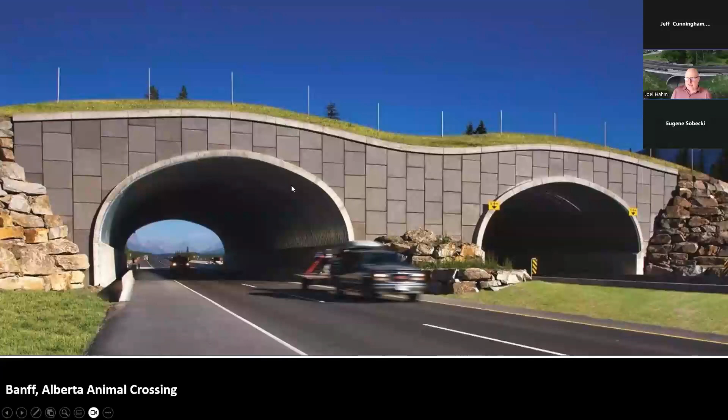And then wildlife crossing in Banff, Alberta, Canada. These are becoming more common. They're popping up, especially out west in the US. And these types of buried bridges are a very good solution for these types of applications.